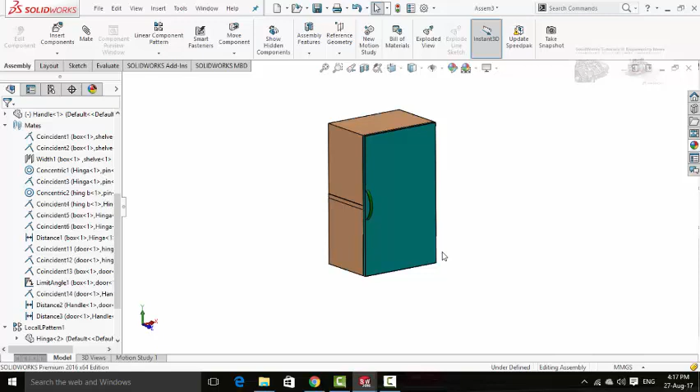Assalamualaikum friends, in this video I am going to show you how to create a box like this in SolidWorks by using sheet metal commands. So keep watching this video till the end.

Let's start. Draw a sketch on the front plane. Select corner rectangle and start it from the origin. Define it 1 meter and 600 millimeters.

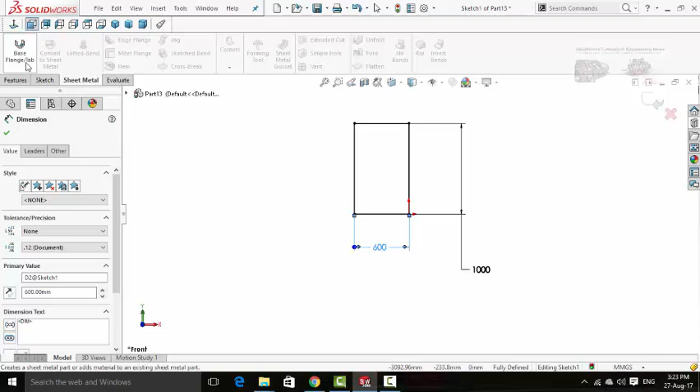Now in the sheet metal tab, select base flange command and extrude it up to 0.3 millimeters, keeping the rest of the things as they are. Press OK button.

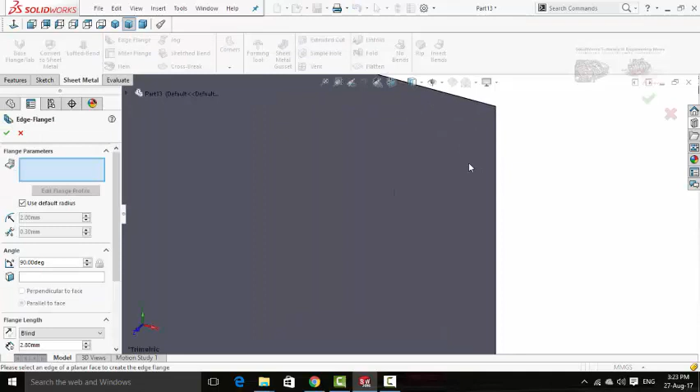Now click on edge flange command and select all these lines one by one, carefully selecting the line on the back side of the part. Extrude it in this direction.

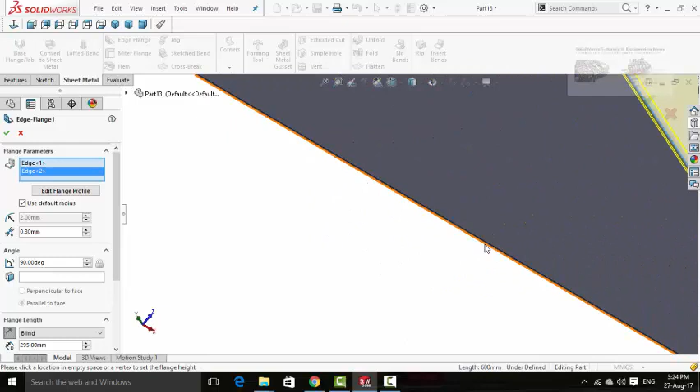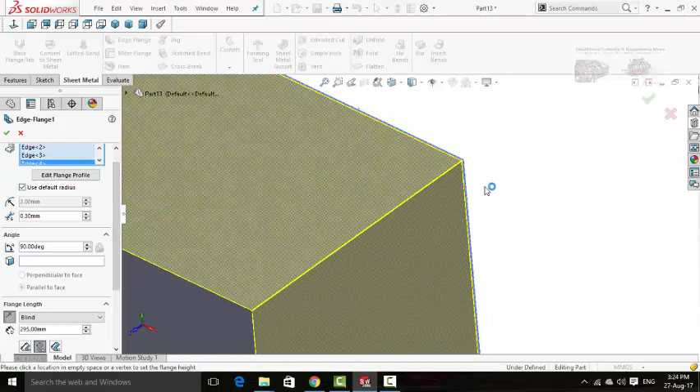Scroll down from here. If you zoom in you see this distance mentioned here, which is the bend radius, here is the bend degree, and here is the extrusion distance. We need to keep this extrusion distance 400 millimeters. Press OK button.

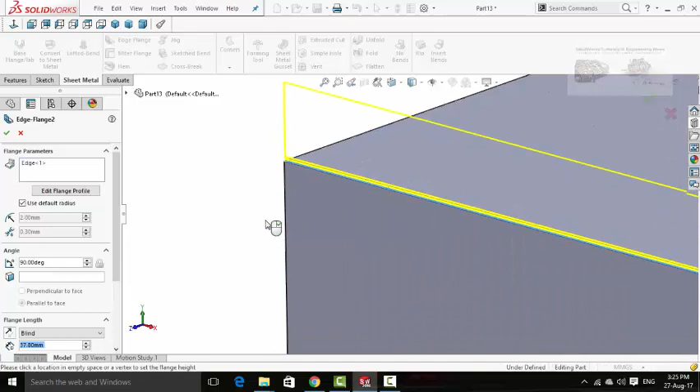Again select edge flange command. This time we need to select these edges one by one, and extrude them in this direction.

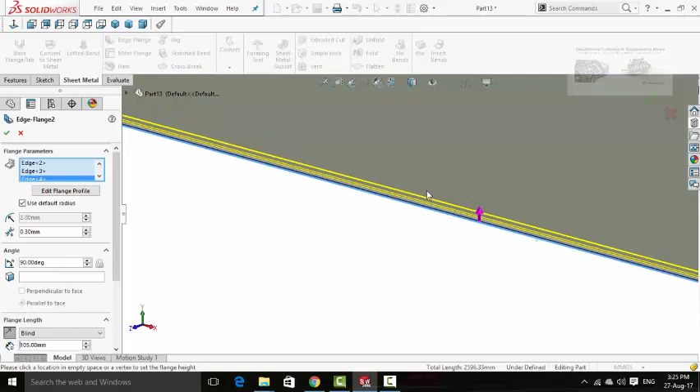30 millimeters is the distance, press OK button. Now the box is ready, so save it.

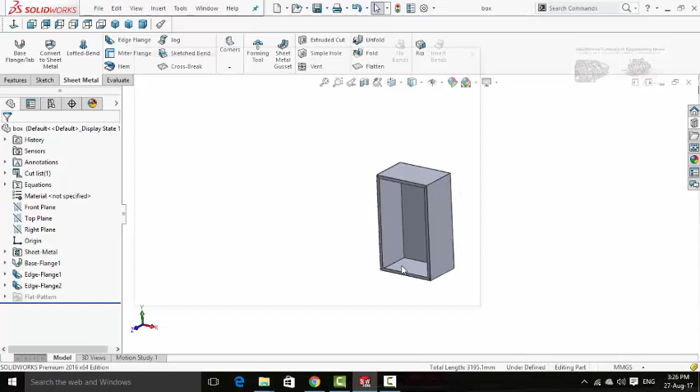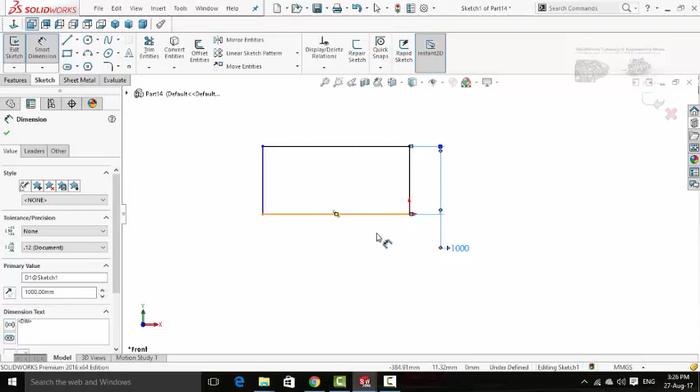Now create a door. Go to new part and sketch on the front plane. Select corner rectangle and draw it from origin. Define it 1 meter and 600 millimeters.

Select base flange tab from the sheet metal tab and press OK button.

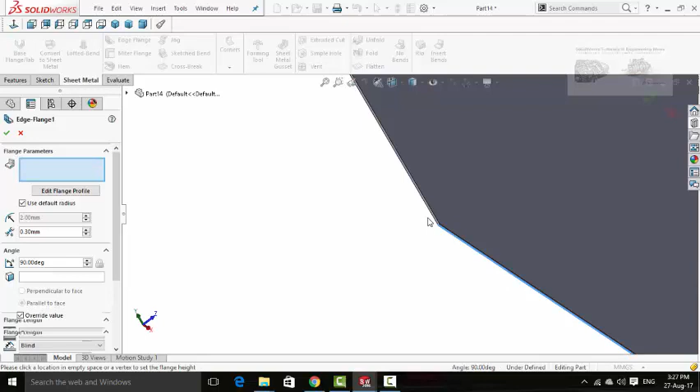Now use edge flange. Select all the corner lines one by one. Scroll down and the extrusion distance should be 20 millimeters. Press OK button.

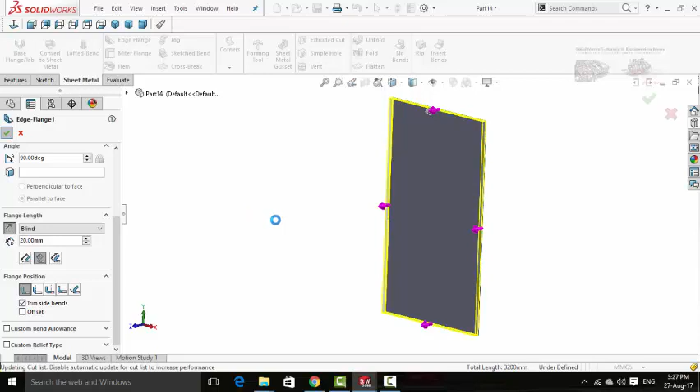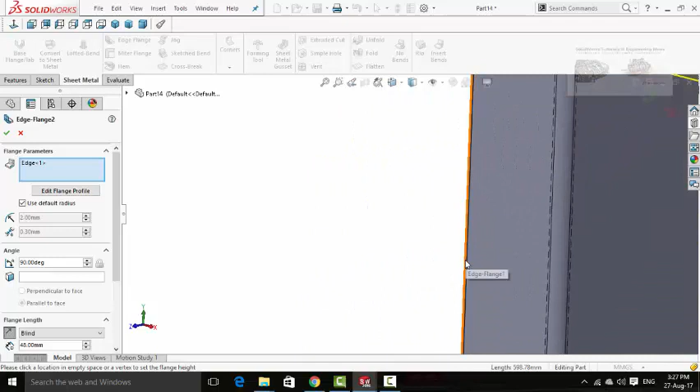Now once again select edge flange and select all these corner lines one by one, in this direction. Scroll down and type the extrusion distance or length as 30 mm. Press OK button.

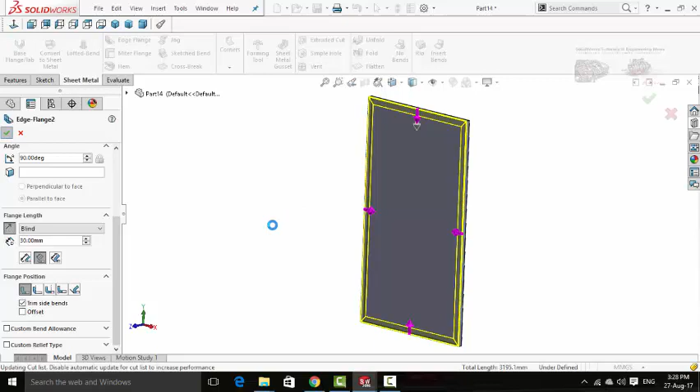Now the door is ready, so save it as Door.

Now create a shelf. For that, create a new part. Sketch on the front plane and draw a corner rectangle from origin. Define it 599.20 and 399.60.

Now again in the sheet metal tab, select base flange tab and press OK button.

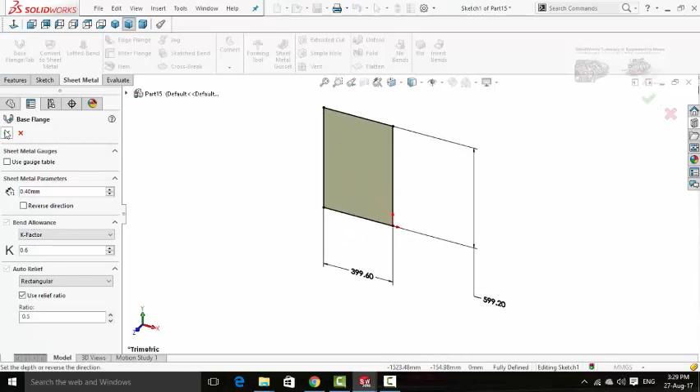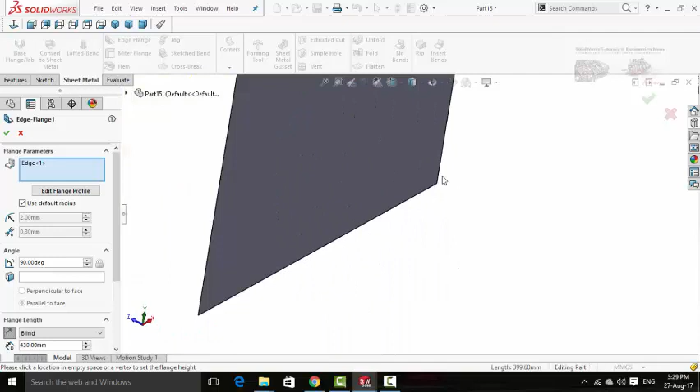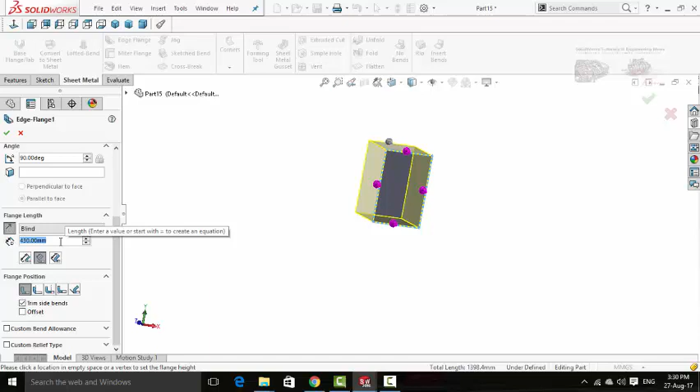Now select edge flange and extrude it up to 30 mm. Press OK button. Now you can save it.

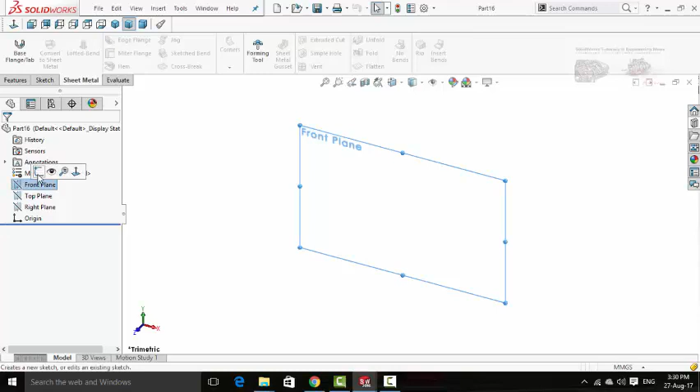Now another new part for hinge. Sketch on the front plane and draw a rectangle from origin. Define it 30 mm and 70 mm. In the features tab, select extruded boss base command and extrude it up to 2 mm.

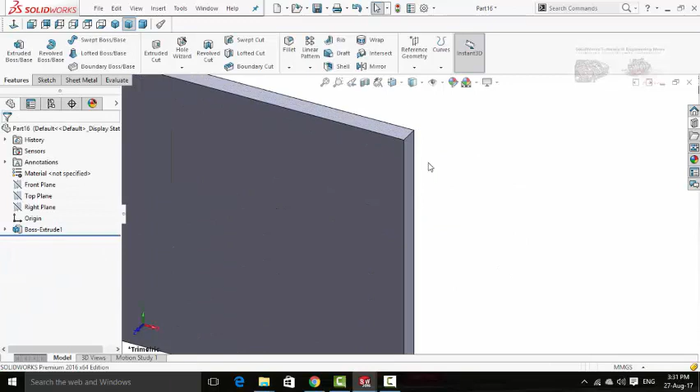Press OK button. Now sketch on this face. Make it normal to by pressing Ctrl+8 and select the perimeter circle. Draw it from this corner.

Now select this point from here and place it on this quadrant of the circle. Press escape, then press and hold Ctrl key, select this corner and then this point. Make relation vertical. Now define it 3 mm.

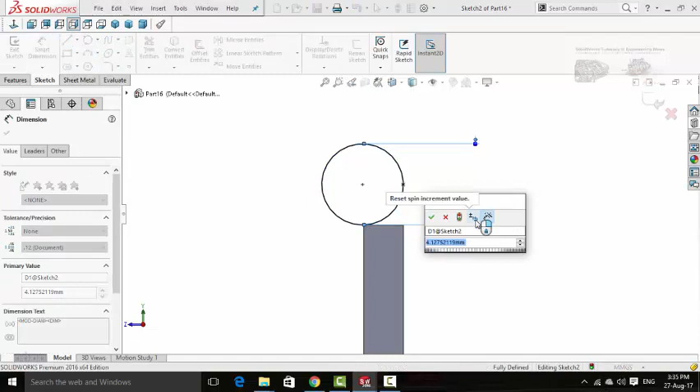Now draw a circle inside this circle and define it 1.5 mm.

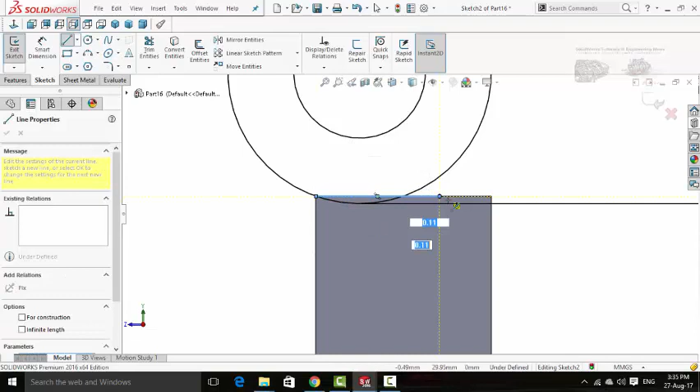Zoom in and draw a line, starting it from this corner to this line. Now select trim entities command and trim the two lines and circle. Define this length for the line, which is 1 mm, so press OK button.

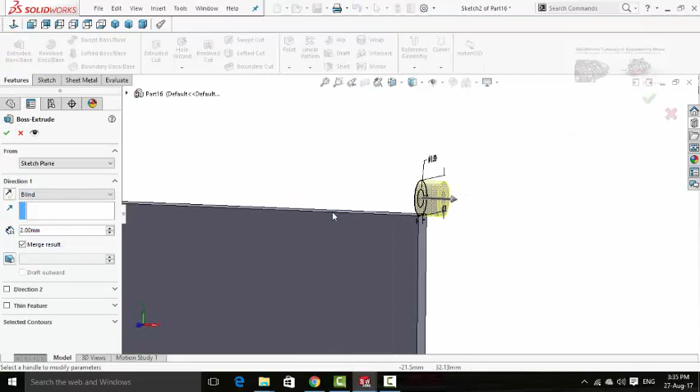In the features tab, select extruded boss command and extrude it up to 10 mm on the reverse direction. Press OK button.

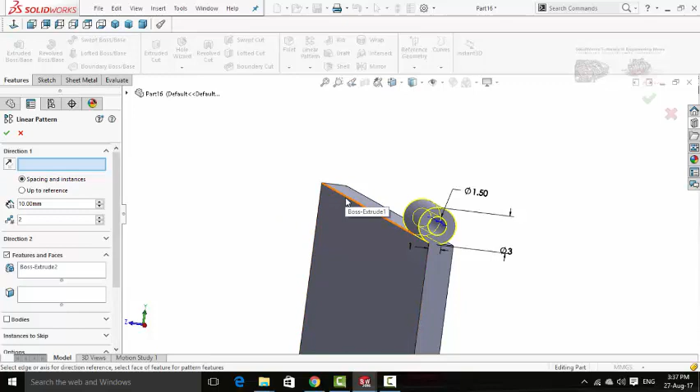Now select this boss extrude and click on linear pattern. First it will ask about direction 1, so select this line as the first direction. Then it will ask about the distance between instances, which is 30 mm on the reverse direction, and the quantity is 3.

Press OK button. So that was the first part of the hinge. Now create another new part for the second part of the hinge, but before that you have to save this as hinge part 1, save it as hinge A.

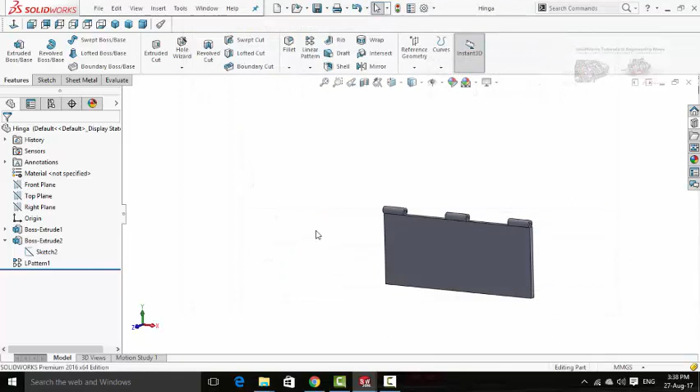Now click on this arrow and select the sketch, edit it, select all the sketch and copy it. Now create a new part.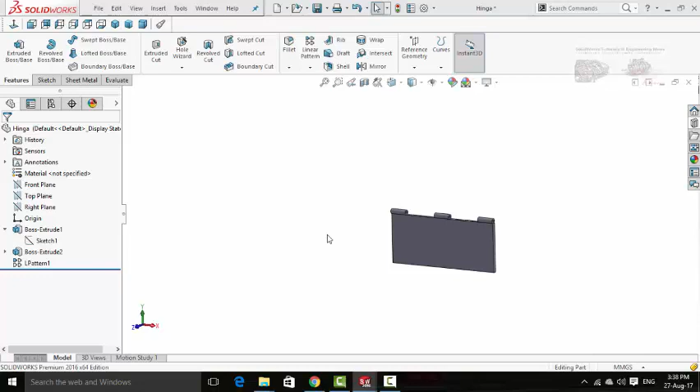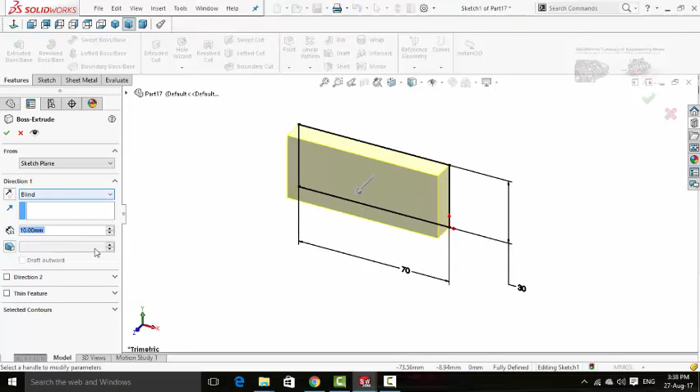On the front plane create a sketch. Now paste that sketch of hinge A, select this corner and then the origin, make relation coincident. Now it is fully defined, so extrude it up to 2 millimeters. Press OK button.

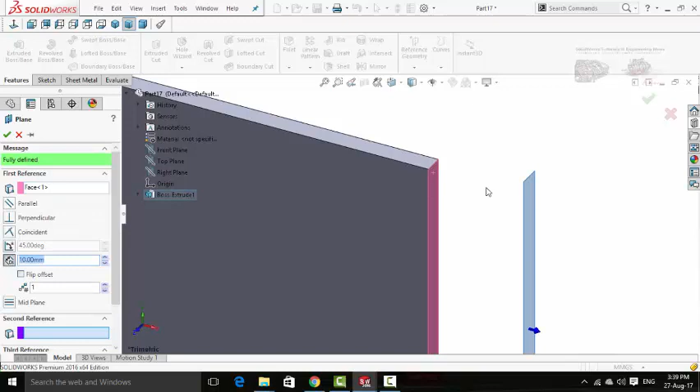Now click on reference geometry and select plane. Select this face as first reference and flip offset. The distance is 10 millimeters.

Press OK button. Now open hinge part A. This time I want to copy the sketch for this part. Click on this arrow, click on the sketch, edit it, select all the sketch and copy it. Save and exit from sketch.

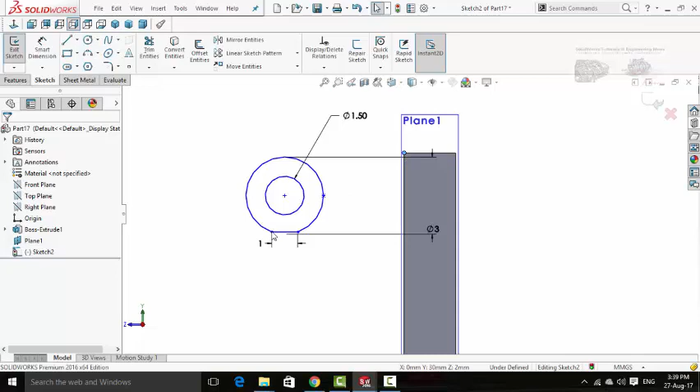Open hinge part B and sketch on this new plane. Make it normal to and paste the sketch. Now select this point and the corner and make relation coincident. Another step is to select this line and then this line, make relation collinear.

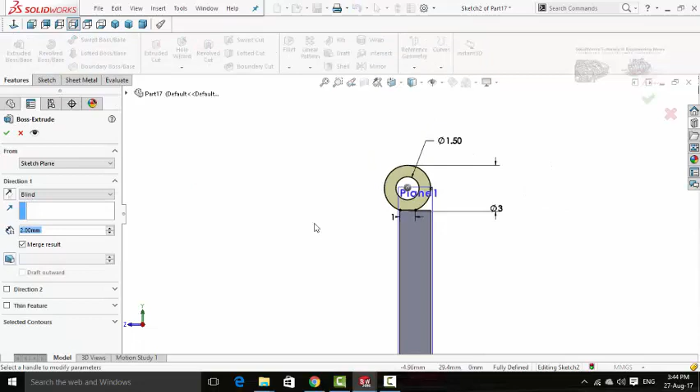Now our sketch is fully defined. In the features tab, select extruded boss base command and extrude it up to 10 millimeters on the reverse direction. Press OK button.

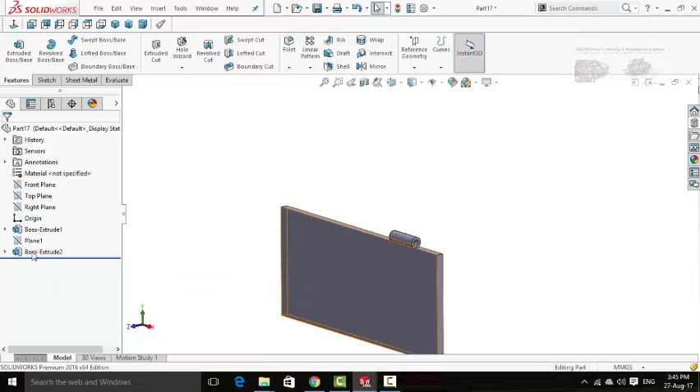Now zoom in and hide this plane. Click on boss extrude 2, then select linear pattern, direction 1 select this line, quantity which is 2.

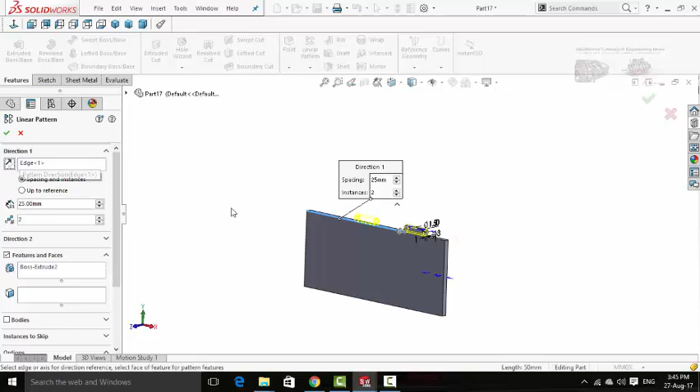And the distance should be 25 millimeters on the reverse direction. Instead of 25 millimeters, this time we need to add 40 millimeters distance. Press OK button.

Now we need to create a pin for these holes. First of all, save this hinge as hinge part B, hinge B.

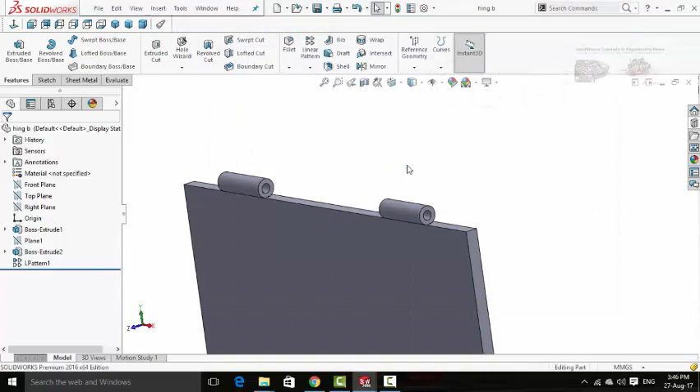Now new part, sketch on front plane and draw a circle, define it 1.5 millimeter, and extrude it 70 millimeters.

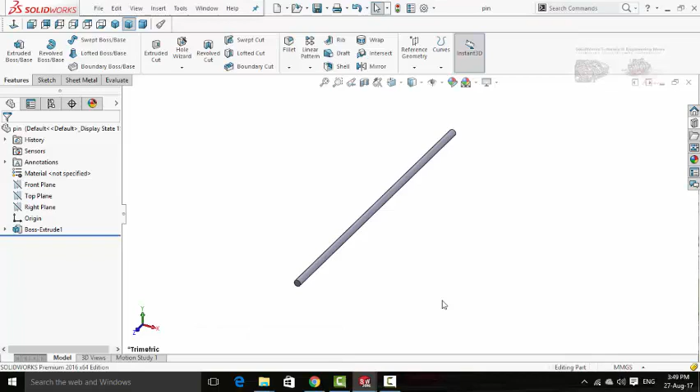Now create a new assembly and import all these parts in the assembly one by one. Select all the parts and drop them.

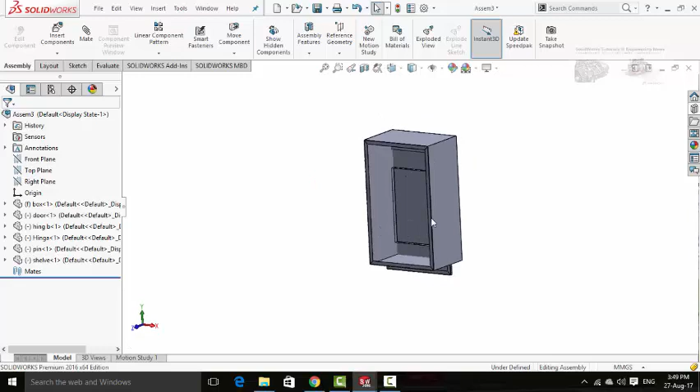Drag it. As you can see, it can't be moved, so it means it is fixed. Right click on it and select float. Now move it. Again right click on it and fix it.

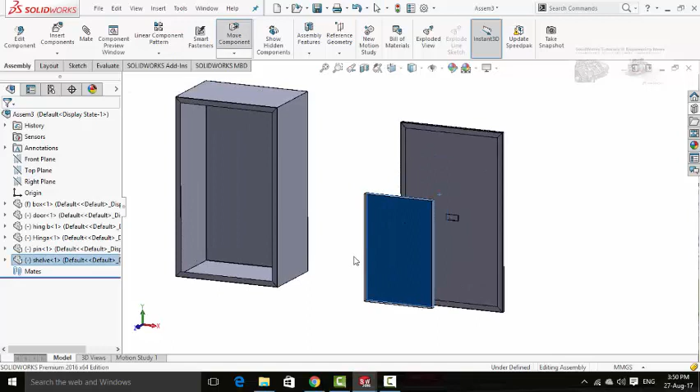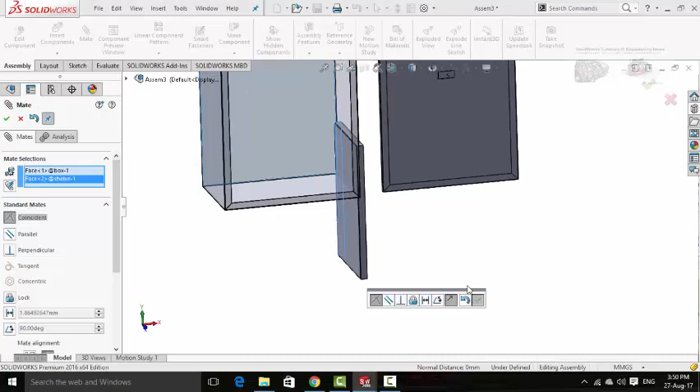Now drag the shelf. Click on this face and select mate. Now click on this face. Press OK button. Now click on this face and on this face. Press OK button.

Now I want to set it in the middle of this box. For that, scroll down from here. Click on Advanced Mate, and from here select Width. Now click on this face and on this face. Now on this face and on this face. Press OK button.

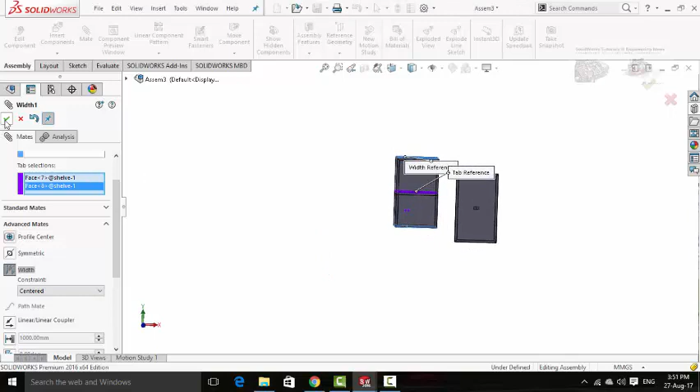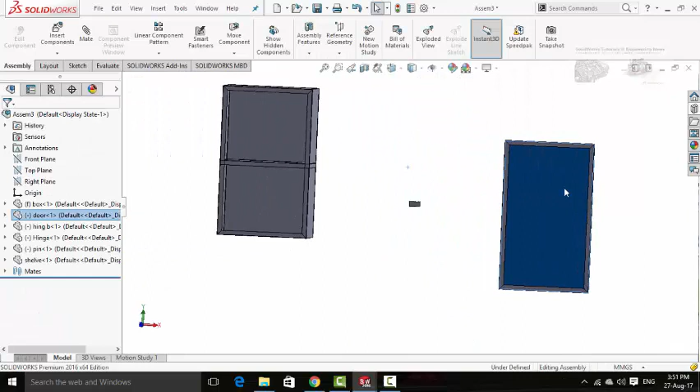Now assemble hinge. Press OK button and drag the door. Zoom in. Now click on this cylindrical face of this pin and select mate. Now click on the cylindrical bore of this hole and do not lock rotation. Press OK button.

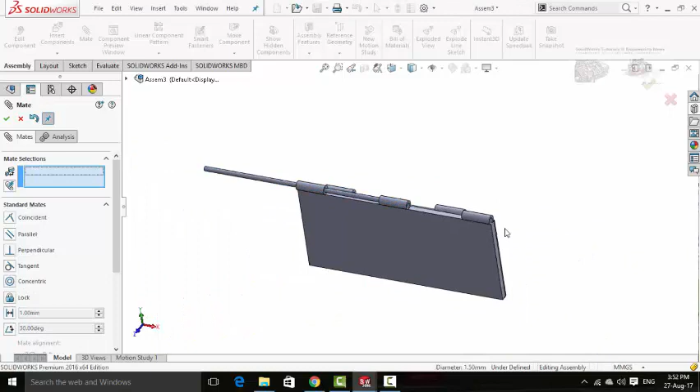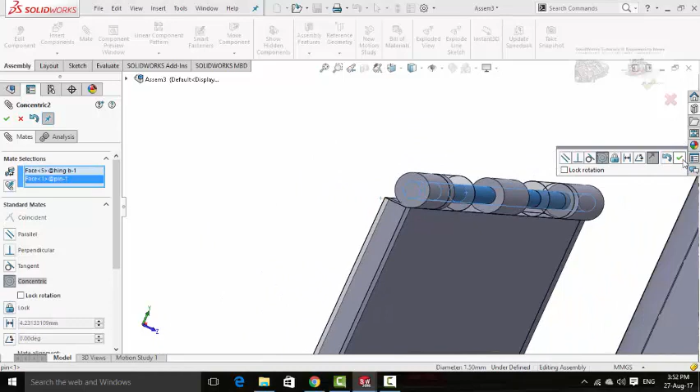Now click on this face and on this face of pin. Press OK button. Again click on the cylindrical face of this hole and then the cylindrical face of pin. Do not lock rotation. Press OK button.

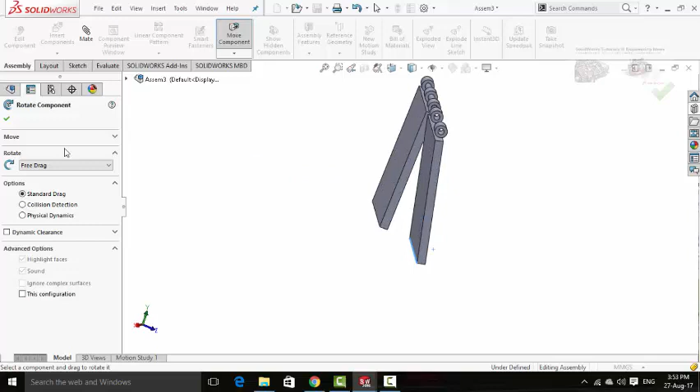Now drag the hinge part A and make some distance between both of these parts. After that, press OK button and from here select rotate. Now press OK button.

Now click on this face and select mate, and then select this face. Hinge is OK and press OK button.

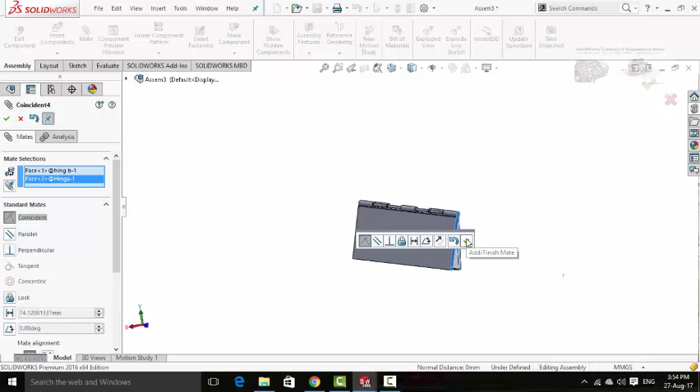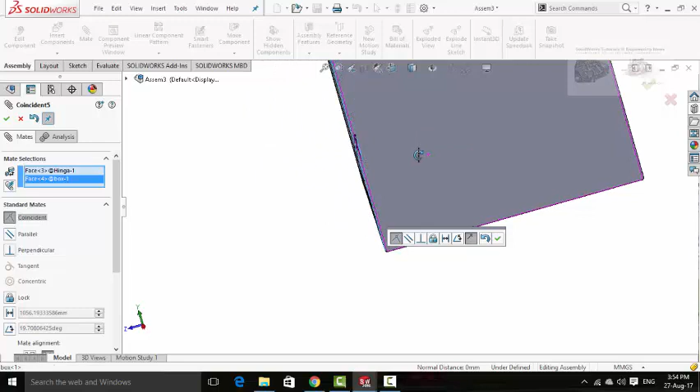Select this face and this face. Press OK button.

Now select this face and this face. Reverse the direction. Press OK button.

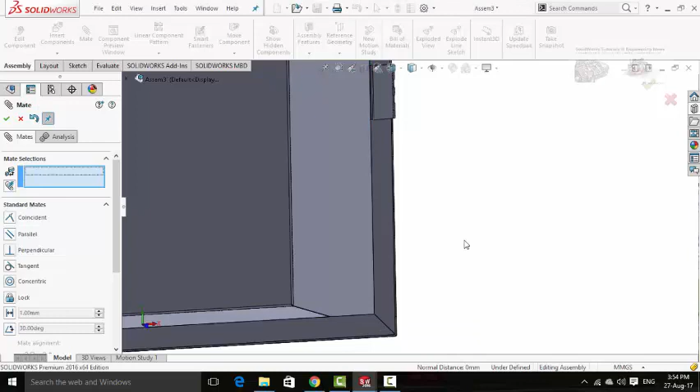Now click on this face and this face of hinge. Make some distance, 200 millimeter. Press OK button. Now press OK button again.

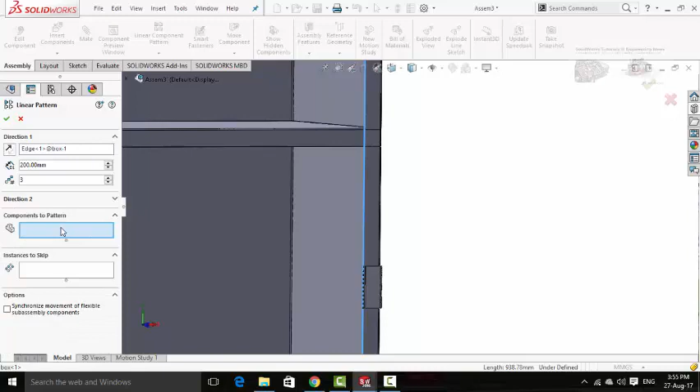Now click on linear component pattern command and the direction 1, click on this line. Quantity is 3 and the distance should be 200 millimeter. We don't need direction 2, and then click on this box components to pattern.

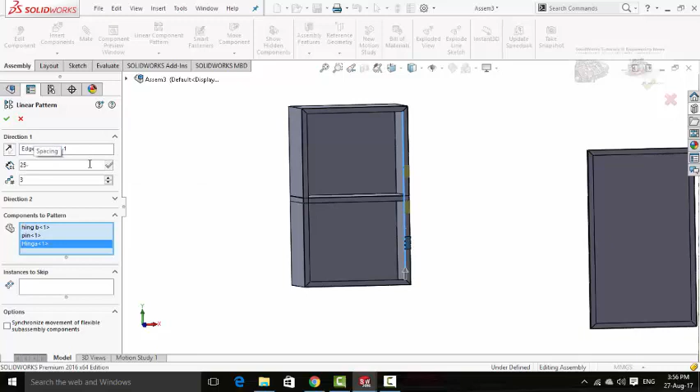Now zoom in and select all parts of hinge one by one, the pin and hinge part A. From here increase the distance to 150 millimeters. Now press OK button.

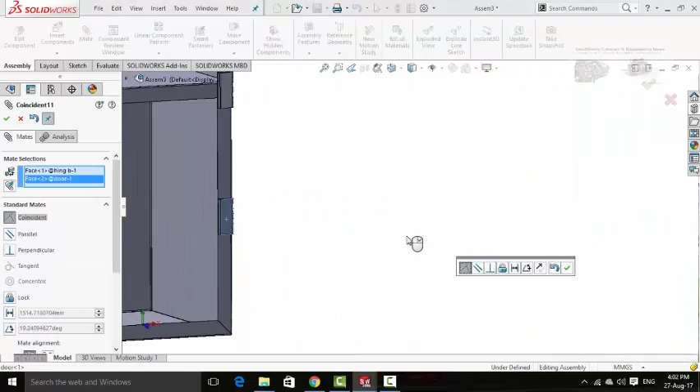Now it's time to assemble the door with the hinge. So for that, click on this face of hinge and select mate. Now click on this face. Click on reverse direction to flip mate alignment and press OK button.

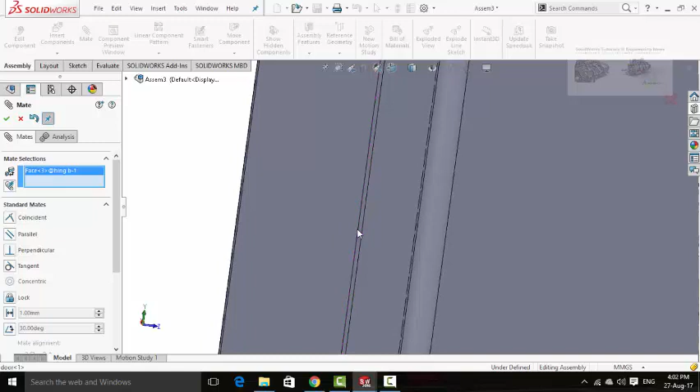Now click on this face of hinge and then on this face of door. Press OK button. Now click on this face of box and then on this face of door, press OK button.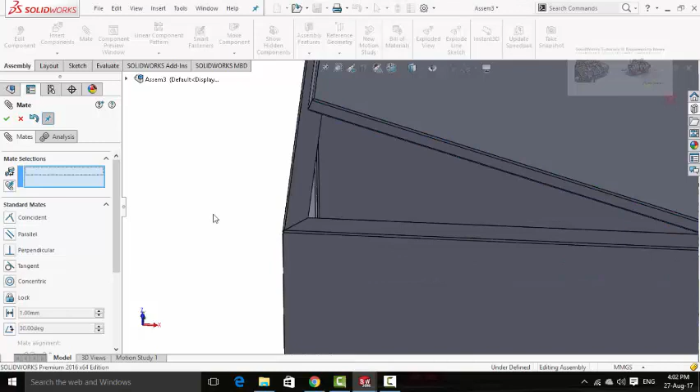Again press OK button and check whether the door is assembled perfectly or not. So it is assembled now, but there is a problem, it can't stop on this position.

To lock the rotation for the door, now to stop the rotation for the door, again click on mate and then scroll down in advanced mate.

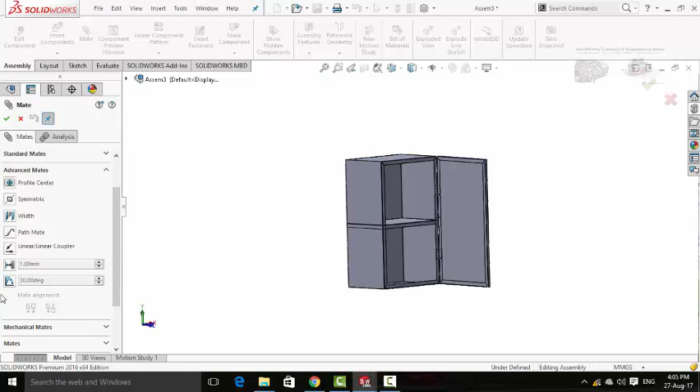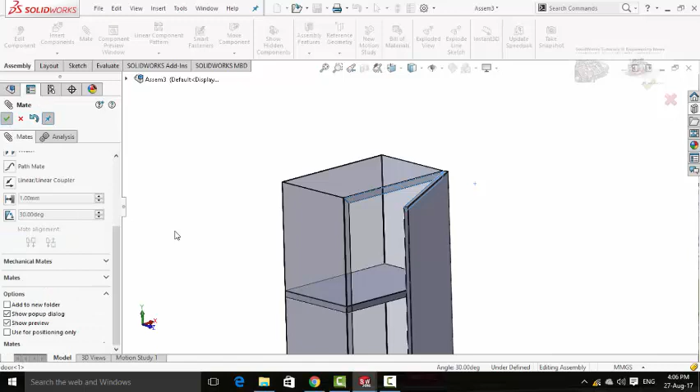Click on angle, select this face and this face. Maximum angle should be 90 degree and minimum angle should be 0 degree. Press OK button. Again press OK button. Now check. So it can't move from 90 degree and from this position it is stopped at the box.

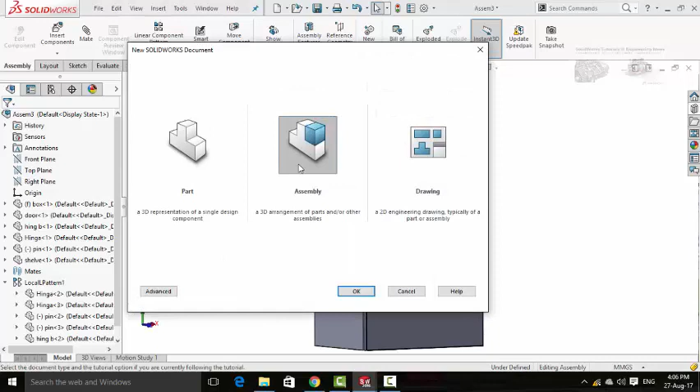One more thing which is left is the handle. So create a new part. Sketch on front plane. Draw an arc.

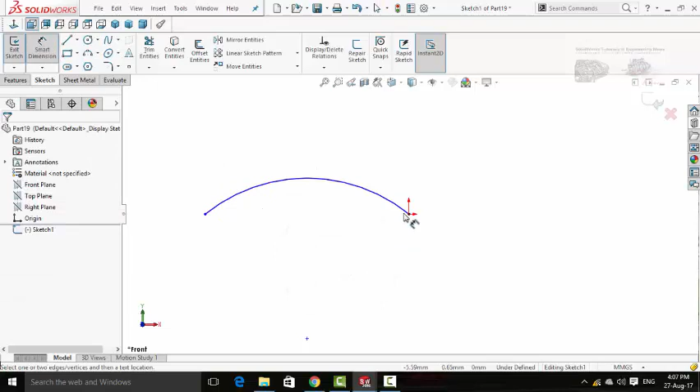Select both of these points and make relation horizontal. Now define them, 200 millimeters, and define this distance from origin.

40 millimeter. Again draw arc, but before arc draw a line like this, another line on this side. Now select both of these lines and make relation equal. Define them 5 millimeters. Now draw arc.

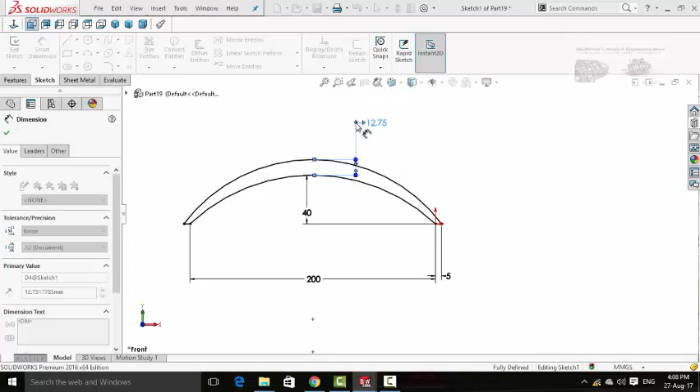Like this and define this distance 8 millimeters. Press OK button, and in the features tab select extruded boss/base command and extrude it up to 20 millimeters. Press OK button.

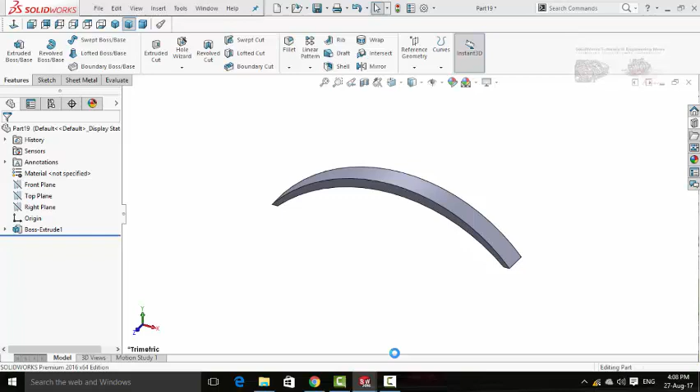Now save it as handle. In the assembly, import it, insert component and search for handle.

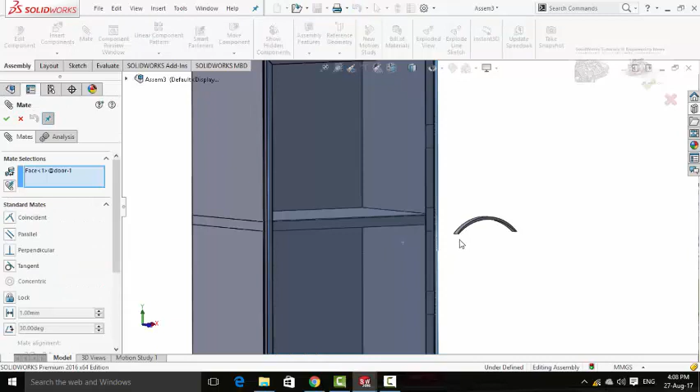Select this face and mate. Now select this face of handle. Press OK button. Now select this face

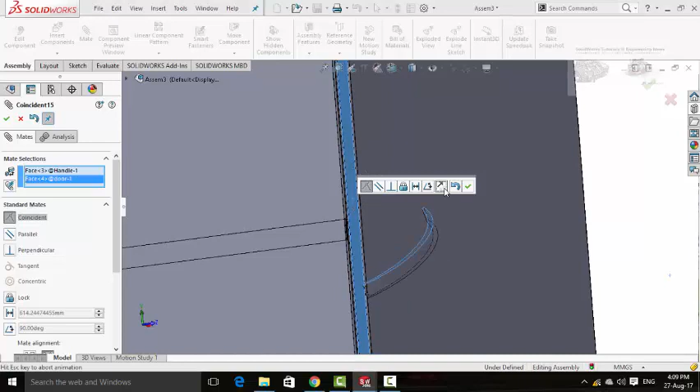and then this face of door in the reverse direction. Now make some distance, 30 millimeters. Press OK button.

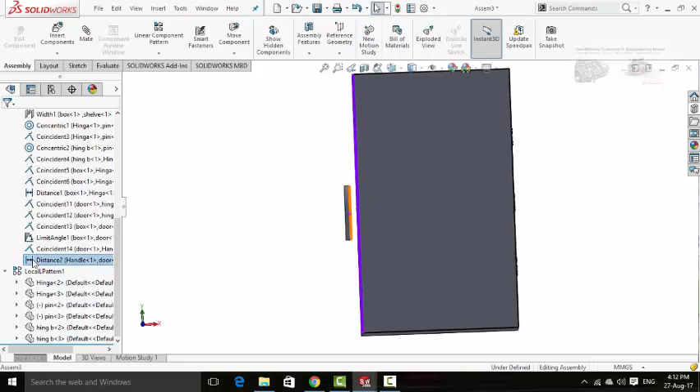Now, I forgot to reverse the direction for this distance, so press OK button and scroll down and drop down this mates option, and at the end select this distance mate and edit feature. Now check this box flip dimension. Press OK button.

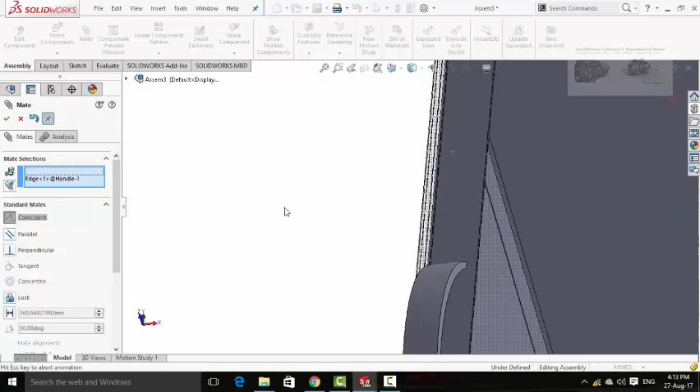Now click on this face of door and then this edge of handle. Make distance 400 millimeters. Press OK button. Again press OK button.

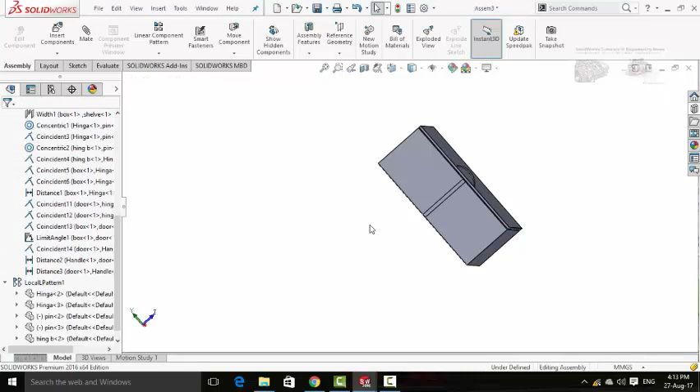Now our box is completely ready. Let's open it.